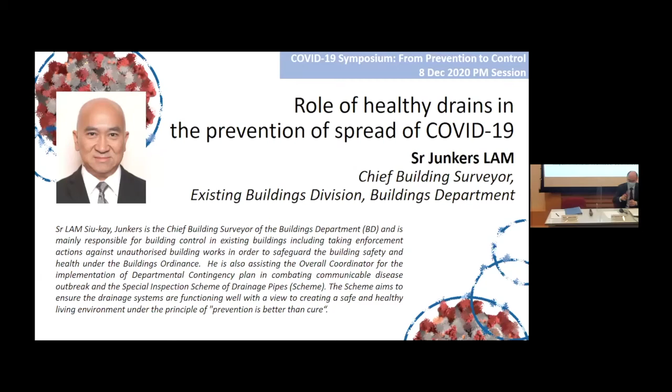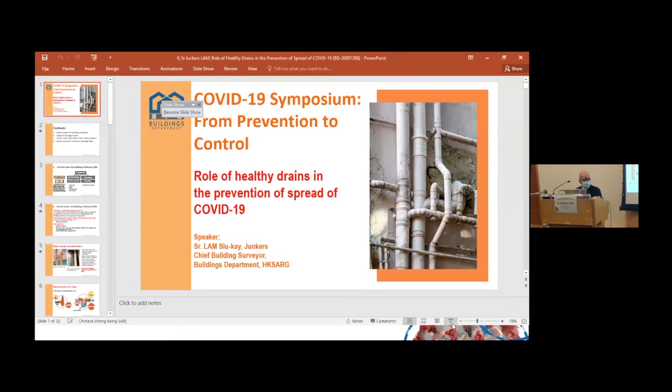I am Junkers Lam, a building surveyor by profession, and I am now working in the Buildings Department, Hong Kong SAR government. Thank you, HA, CHP, and also Department of Health for having me here to talk about something on drainage, with the topic: role of healthy drains in the prevention of spread of COVID-19.

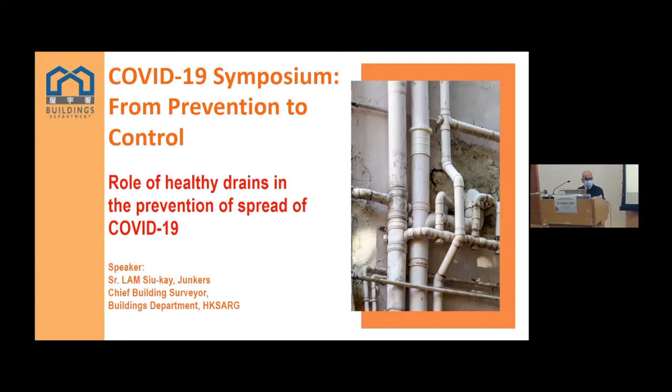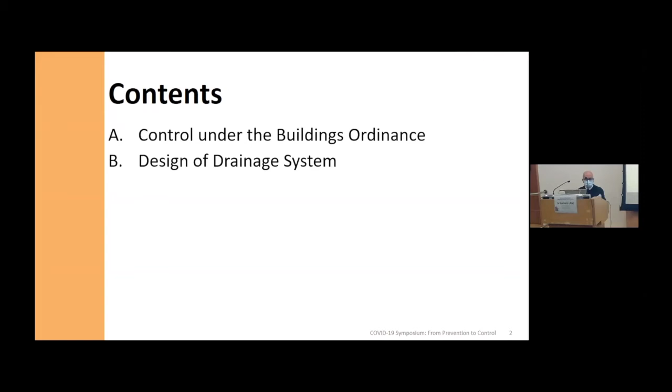The content of my presentation is divided into the following parts. A, control under the Buildings Ordinance. B, design of the drainage system. And C, lessons learned: the SARS in 2003, Amoy Gardens. And the last part is the special inspection scheme of drainage pipes.

In preparing this PowerPoint, I reminded myself not to include too many technical details, otherwise it's too boring. So I will adjust it a little bit by showing only the essential aspects, with some key points and illustrations in layman terms, such that the PowerPoint would be easier to understand. Perhaps some of you may be experts in the building industry, but please bear with me if I use some layman terms or some technical terms.

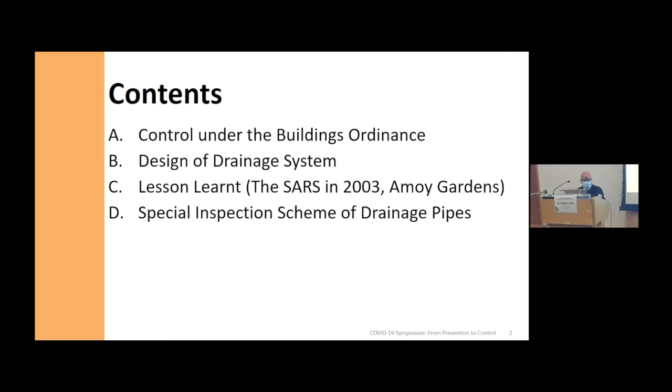The main purpose is to highlight the importance of healthy drains in buildings, how healthy drains make possible healthy buildings, and then how healthy buildings make possible healthy occupants.

Here is Part A concerning the control under the Buildings Ordinance, because the Buildings Department is one of the government agents to administer building control under the Cap 123 Buildings Ordinance. In the slide, you can see there are 3 departments or 3 authorities taking care of buildings or building works in Hong Kong.

Some of them are government buildings or public housing blocks, which are under the jurisdiction of ArchSD and Housing Department respectively. For example, public rental housing blocks are fully exempted from the Buildings Ordinance. And government buildings, for example public libraries, markets, stadiums, hospitals, government offices, are under the jurisdiction of the Architectural Services Department. They are also not subject to control under the Buildings Ordinance.

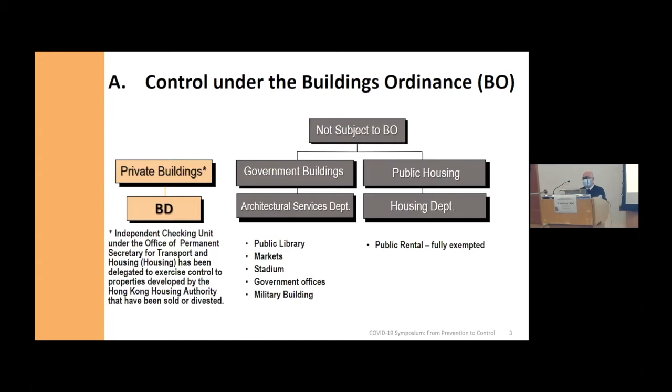Then what else is under Buildings Ordinance control? That is all the private buildings. For example, offices and hotels on private land. The building works, including drainage work, are also subject to the control of the Buildings Ordinance. So in other words, drainage or the maintenance of drainage work is also subject to the control of the Buildings Ordinance.

So let me say a few words on the ordinance. Section 28(1) of the Buildings Ordinance, Chapter 123, stipulates that all drainage work for any building shall, save as provided by regulations, be carried out by the owner of such building to the satisfaction of the Building Authority and in compliance with regulations.

You may ask, how can the architect or the engineer or the designer comply with this section, because it just says to the satisfaction of the Building Authority. How? Okay. There are also subsidiary regulations, called the Building (Standards of Sanitary Fitments, Plumbing, Drainage Works and Latrines) Regulations, which is Cap 123I. It provides the technical requirements concerning drainage work, and specifies to what standard the designer or architect should comply. Then the Building Authority would accept it under the Buildings Ordinance.

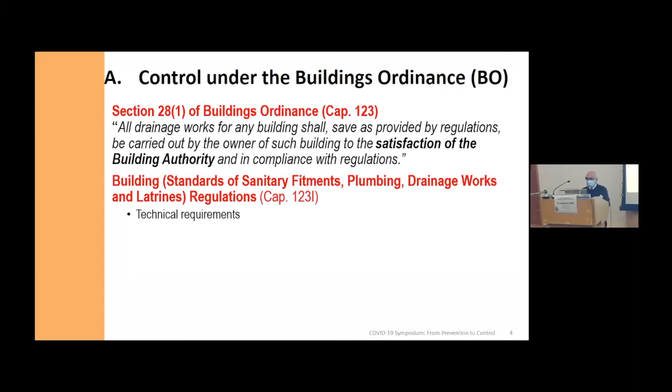So these are the regulations. The main objectives are, first, health and hygiene for the benefit of the users and occupants, or in other terms, the general public. And the drainage work has to be designed and operate as efficiently as possible, such that all the rainwater, wastewater and soil water discharged into the government sewage system are treated properly and efficiently. That is the main objective of this regulation.

The end result is to prevent the contamination of effluents and also prevent the spread of smell, insects and bacteria, etc. So in health or medical terms, just like the excretory system of the human body, we have to make sure that all the waste is discharged properly and efficiently.

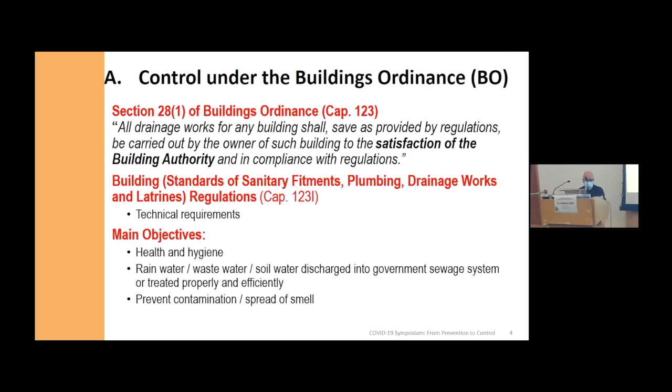In scrutinizing the drainage plan for compliance with the regulation, what are the major considerations we should focus on? That means, what are we really concerned about when we're talking about drainage work? Here are two pictures showing first the external wall of the building. You can see there is drainage work attached to the external wall of the building.

There are some bigger pipes, there are smaller pipes. All these are comprising the drainage system. And also the second picture is showing the internal pipe duct, which is accessible from common parts.

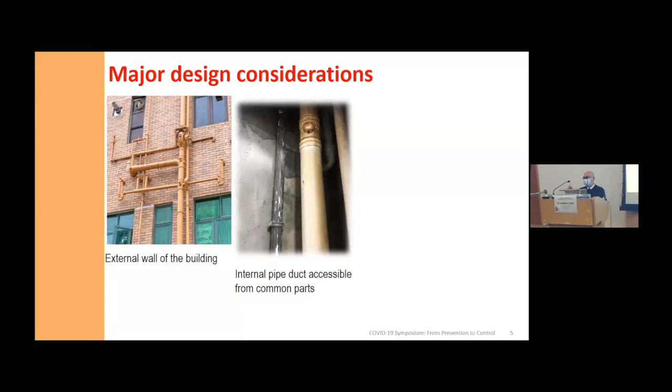What I'm showing here is the main consideration is the proper access to the drainage work. That means we have to have a way to carry out the inspection, to carry out the maintenance and also the repair.

And there is a new building construction regulation which will be effective very soon. One of the main requirements is the access for external maintenance that will be stipulated in this new construction regulation.

And also there is a code of practice on design for safety, external maintenance, that provides some guideline for the practitioner and also the users, so to speak, to look after the design for safety of the external maintenance work.

And also the Buildings Department had issued guideline, so-called PNAP APP 93. There are further details showing the way the designer should pay attention to in order to provide a proper access, or referring to the importance of access.

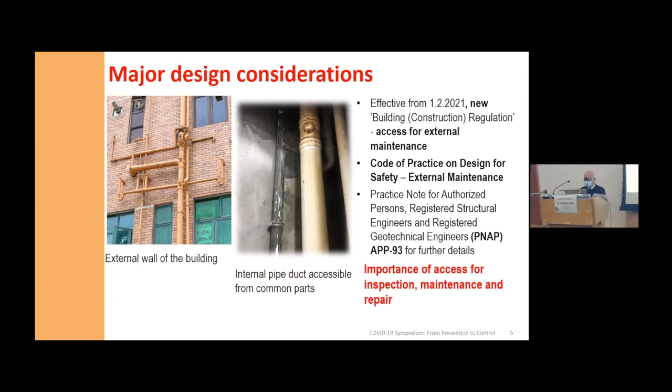For the importance of access, may I just draw an example in your medical or clinical aspect? Just like the doctors doing diagnosis with their patient, they have to have proper access to identify all relevant symptoms of the patients, no matter externally or internally. That is almost the same principle in drainage work. Okay.

Another consideration is the requirements for traps. The picture showing here is the two typical traps, what we call a device to hold certain amount of water seal such that the air or the smell would not get back into the interior.

Let me explain a little bit more. For example, this one is called bottle trap, which is very typical sanitary fitment. You can easily find it underneath a sink. This bottle holds the water, and the discharge water coming in from here by gravity will fill up the bottle, and then the extra amount of water or the waste will drain away this way by gravity.

It's a gentle fall. And the bottle here holds up the water. That is what we call the water seal, such that with the water filling up here, the smell would not get in because the water is still there. It would not get back to the pipe.

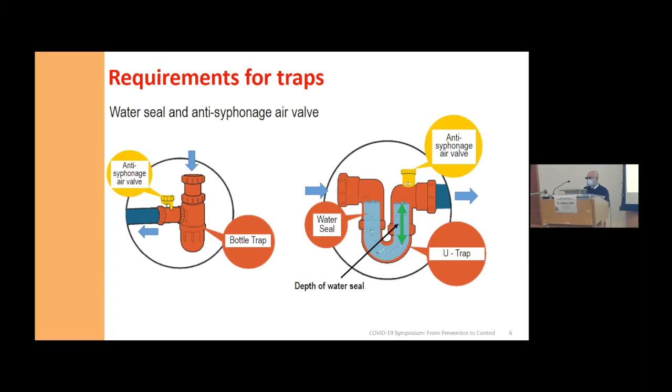But the water inside the U-trap will be kept there. So the smell and also the bacteria would not find its way to get back inside the interior because there is a barrier. The main purpose is to let the discharge pass through but leave the water there to prevent the smell and also the bacteria getting back into the interior.

Okay, for the trap, there are also requirements stipulated in relevant regulation concerning the water seal. In regulation 24 and 25 of the regulation I just mentioned, there is a simple dimension. For example, different types of fitments, soil fitment we just mentioned, and also waste fitment, for example basin, bath, floor drain, they have different requirements, for example the depth of the water seal.

For soil fitment, the depth of water seal is 50 mm, which is a little bit larger than the waste fitment, for the basin and bath, which is only 40 mm. But if the waste fitment with waste pipe is connected to a soil pipe, then the depth of the water seal will be double.

The requirement is more stringent because for waste pipe connected to a soil pipe, the soil pipe carries solid waste, so the water seal should be a little bit more. And also the diameter: you can see for discharging soil, the internal diameter is much larger, which is 80 mm, whereas for normal waste, the diameter is only 32 mm.

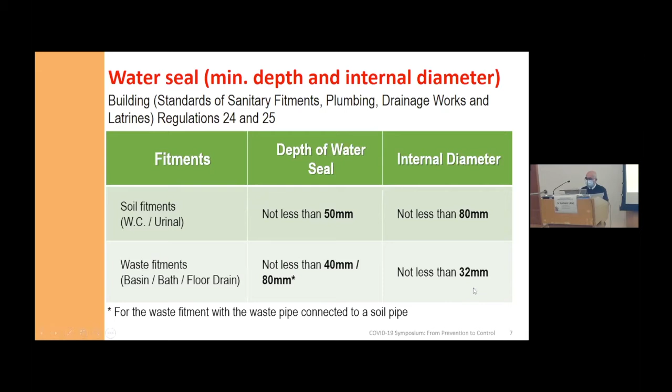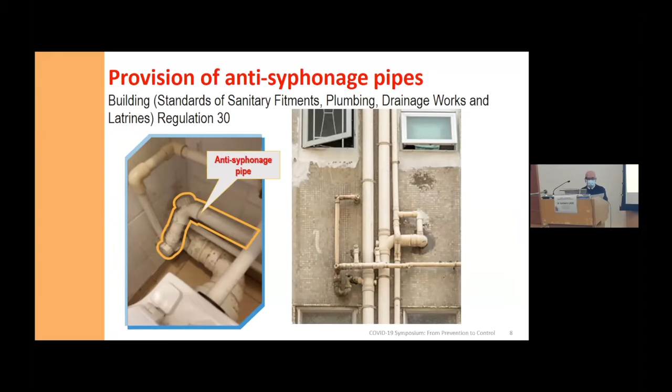Okay, if you look at the external wall, you can also tell there is an anti-syphonage pipe. This one, for example, this is the anti-syphonage pipe, and also this one. And this pipe, by the nature of its name, is called anti-syphonage. So the main function is to stop the siphonic action.

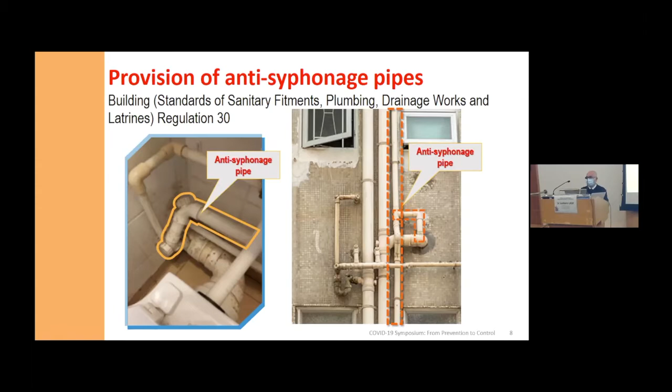And this anti-syphonage pipe would be carried up to a height not less than 1 meter above the roof. For example, in these two pictures, typical high-rise buildings in Hong Kong, you can see this is the anti-syphonage pipe and also connected with the ventilating pipe. They are carried up to a height of not less than 1 meter above the roof. These two are also the ventilating pipes.

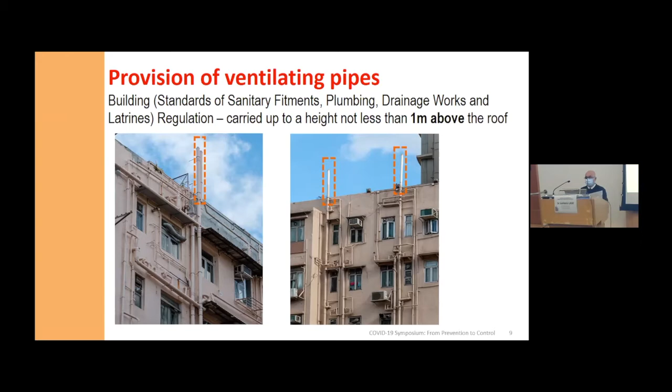And the main purpose of this ventilating pipe is to balance the pressure inside the pipe caused by a suction effect induced by fast-moving water flow in the main downpipe. Usually, the air would get into the opening of the ventilating pipe to balance the pressure, but chances are some air would also be coming out from the ventilating pipe. Hence, they are required to be carried up to the main roof, above the roof level for at least 1 meter, where the outgoing air would be diluted by the open air.

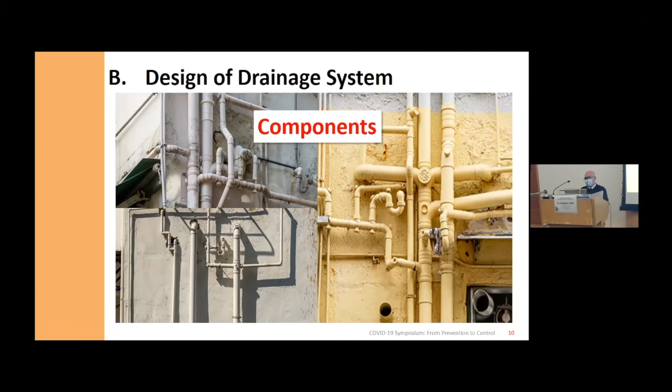Okay, part B is the design of drainage system. You can see there are so many pipe works, and what are the components? We are going to focus on the main components. First, the rainwater pipes. The rainwater pipe is to discharge the rainwater from the main roof, flat roof, or balcony, etc. Because for a building, there must be some roof. In Hong Kong, most of them are flat roofs. In other countries, North America or Europe, you can see other roofs, say the pitched roof. But in Hong Kong, most of them are flat roofs.

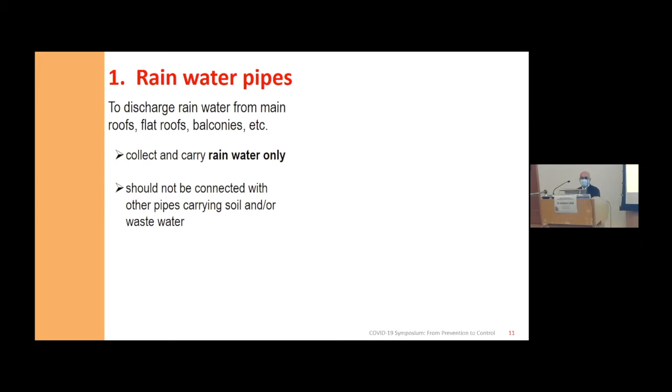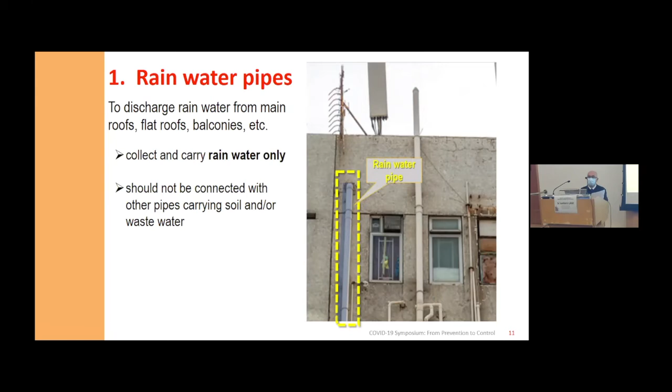So we have to carry away the rainwater. Otherwise, flooding will occur during rain. And also, the rainwater, if not properly drained away, will create a hygiene problem. So it collects and carries away rainwater only. That means it should not be connected with other pipes. For example, this picture shows the rainwater pipe. You can see there is no other connection with it. It's only designed for carrying away the rainwater.

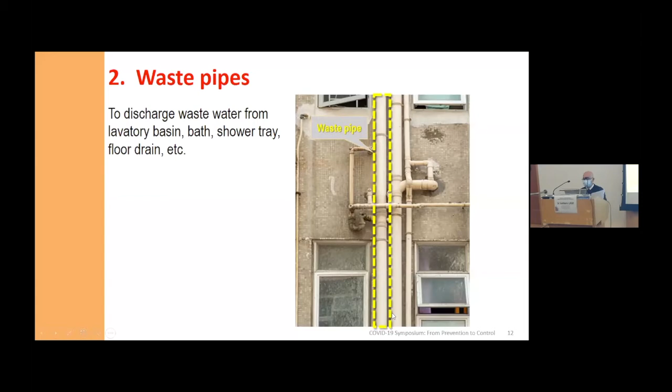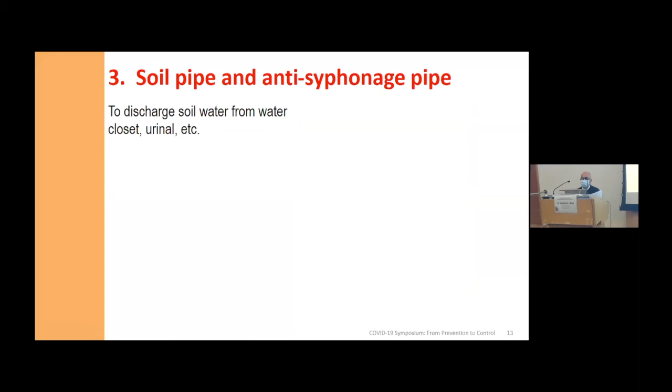And the soil pipe. This is the bigger pipe to discharge the soil water from water closet, urinal, etc. This is also the picture of the previous slide, but for the soil pipe, this is another pipe. This is the one on the left hand side, or sorry, right hand side. And this is the soil pipe. How can you tell? From the size of it. You can see this is the WC, the outlet of the WC. This is much bigger than this one. So you can guess this one must be the soil pipe because it is used to discharge the soil water from the water closet.

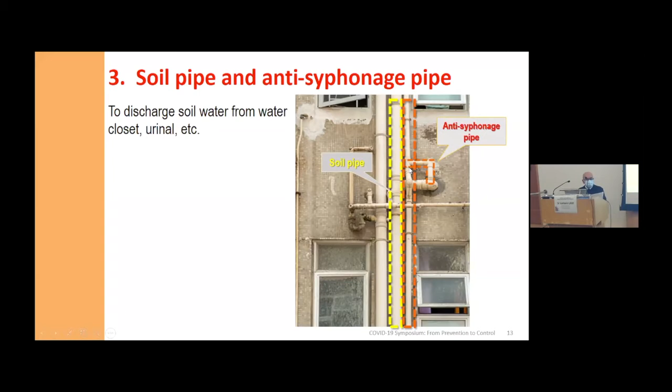And also connected with the soil pipe, this is the outlet, and this one is the anti-syphonage pipe. This is the ventilating pipe. The one with the dotted orange line is the anti-syphonage pipe. Okay, they are the main components in the drainage system.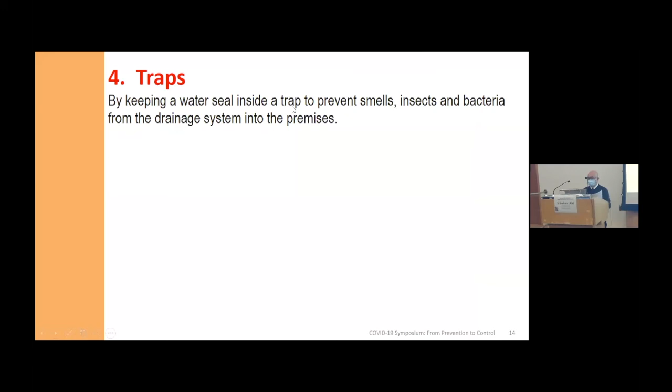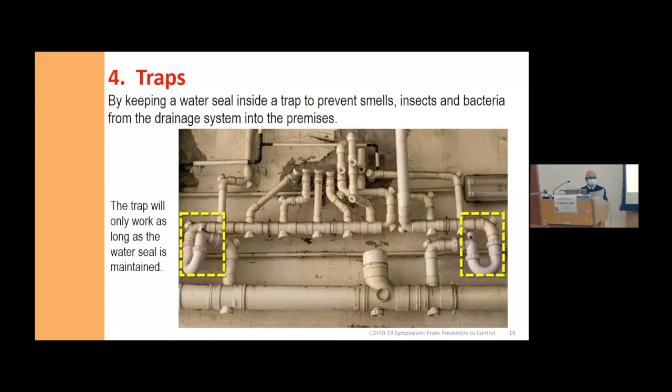Okay, what are the types of traps? There are quite a number of types, but the most popular types in Hong Kong are two. One is the U trap that I have shown you in the previous slide. This is the condition without water, before the assembly, and you can see there is a U shape. The one with a higher level is the inlet. The one with a lower level is the outlet, such that the water can flow and discharge away.

And the other type is the bottle trap, just like a bottle. This is showing the condition without water and also the condition before assembly. This is the bottle part. The water comes from the top and fills up the bottle, and then finds its way when its level rises, and then discharges through here.

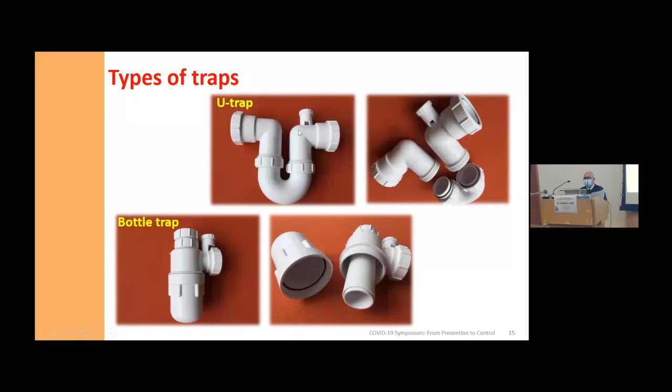And you may notice that there is another small part in each of the traps. This is the anti-siphonic air valve, just like this one and this one. Let me explain a little bit. This part is an air valve. That is a one-way valve.

That means the air can get into the U-trap, but the air and also the water cannot go out. That is a one-way valve, just like a one-direction gate, for example. It opens only in a single direction. It is a small device that can let the air get in, but cannot let the air and the water go out.

Its main purpose is to balance the pressure inside the trap, such that the water seal would not be drawn away. I will show you later how it works.

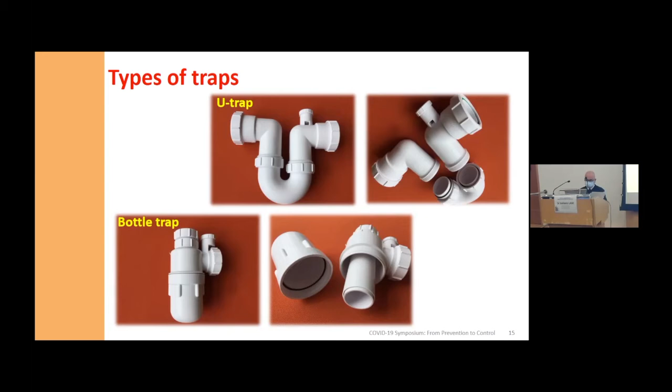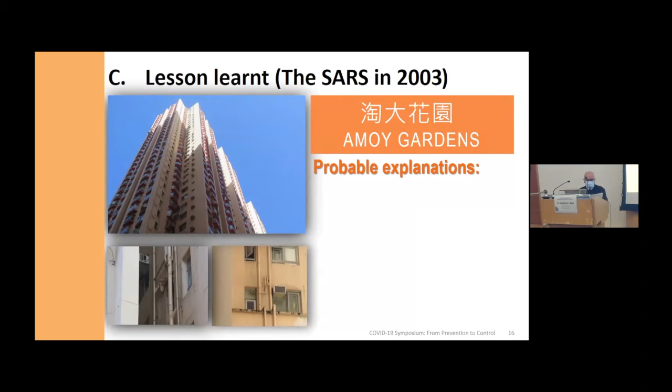And this is part C, the lesson learned, the SARS in 2003. Most of us would not be unfamiliar with the SARS in 2003. According to the investigation report published by the Department of Health in April 2003, no one single factor could account for the outbreak, and it is likely to have been the result of a combination of factors, including person-to-person contact, combined with the presence of a highly infectious index patient, and also the possible spread by way of use of the communal facilities.

And concerning the drainage, they also found possible factors regarding a defective anti-syphonage pipe at the 4th floor of Block E, and concerning the sewage system, they found that it had not been properly maintained, especially the U-traps. The water seal inside was found dried out in some traps. That is the main finding. It concerns the loss of water seal. For more detail, you can refer to the investigation report published by the Department of Health.

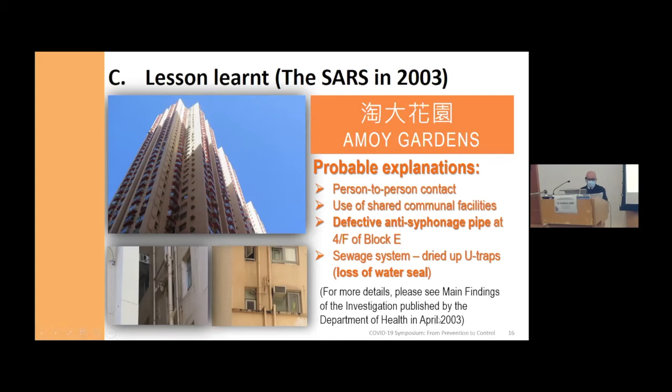And I would like to take this opportunity to explain why the water seal inside the trap could be lost. First, it is by natural evaporation. For example, if the sanitary fitments have not been used for a long time, depending on the ambient temperature and the humidity, the water seal inside a trap would dry up easily, especially in the dry season. So if you fill up the U-trap regularly, for example, every week with half a liter of water, then it should be okay.

The second main reason is leakage. That is a maintenance problem, or the owner has not paid attention to any symptom concerning the drainage work. For example, if you smell something bad, or if you see some water stain, then that is a symptom of leakage. Employ a building professional or contractor to have the drainage system checked carefully.

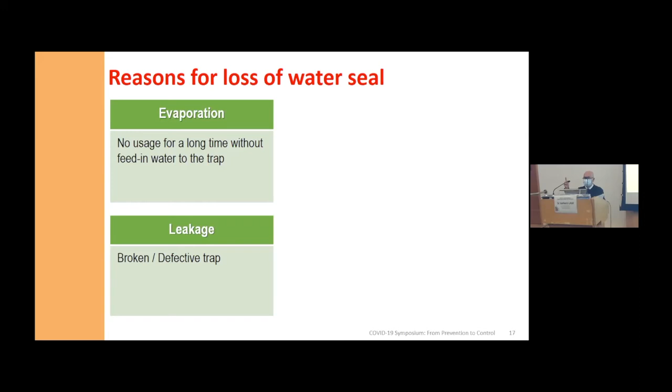The other reasons are rather technical, but I will explain a little bit more. That is self-siphonage. That is a partial vacuum formed when a large amount of water discharges. For example, the bathtub: after you use the bath, you just lift the plug and the water drains away. The large amount of water flows very fast and in full bore. That means it fills up the branch pipe.

That will create a partial vacuum in the trap. That partial vacuum will draw away the water seal in the trap if there is no anti-siphonic device. That's why all the traps should be provided with an anti-siphonic device, either the air valve or a connection to the anti-siphonic pipe.

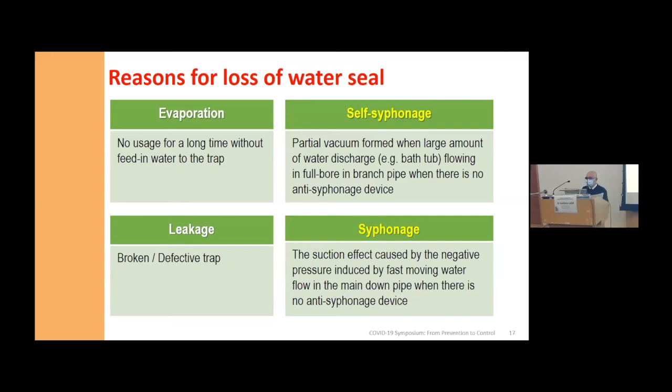And the fourth one is induced siphonage. That is the suction effect caused by the negative pressure induced by fast-moving water flow in the main down pipe. That is the picture I've shown you a few slides ago, the main stack there. When the water discharge moves downward very quickly, it creates suction. If there is no anti-siphonic device, then the water seal in the trap will be sucked away or carried away also.

Okay, I think even though I have tried to explain a little bit more, I think it's better to have a look at the videos such that you can see how the siphonic effect is created, and also how to prevent this siphonic effect. So I would like to show you the video.

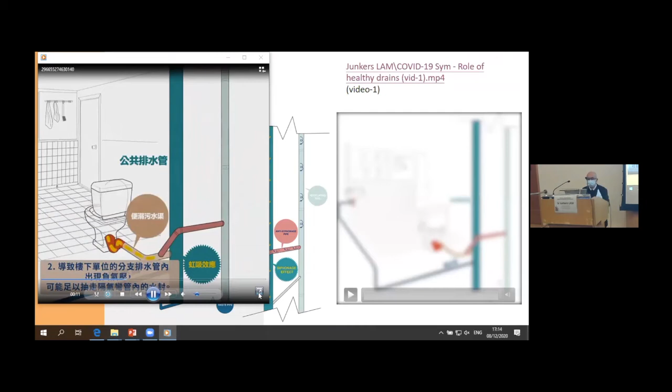This is the fast-moving water coming down the pipe, and this is the water closet. This is the soil water. If there is no anti-siphonic pipe, the water seal in the part highlighted with orange will also be sucked away. That is the siphonic effect.

But if it is connected with a ventilating pipe or anti-siphonic pipe that is connected to the higher part of the branch, connected to the water trap, then the air, this is the air from the roof, the air will come in and neutralize the negative pressure such that the water seal would not be carried away.

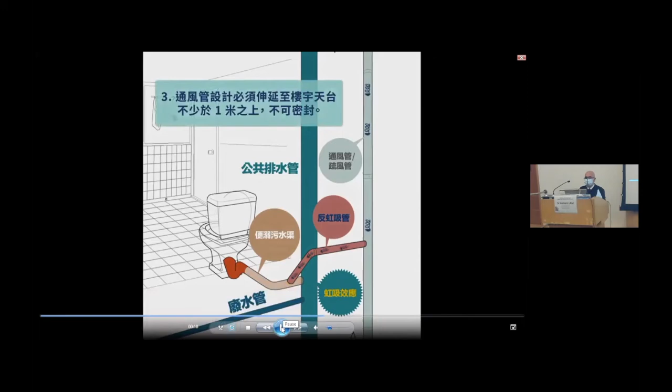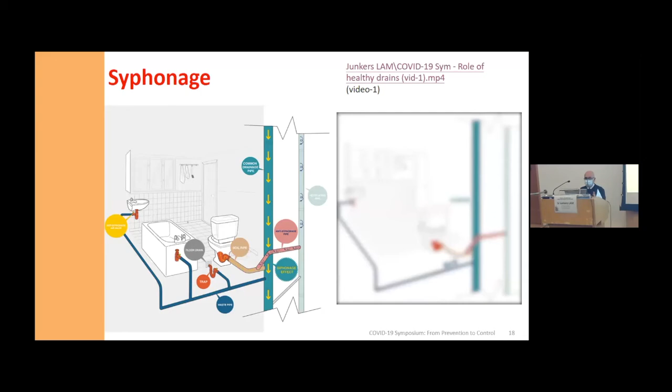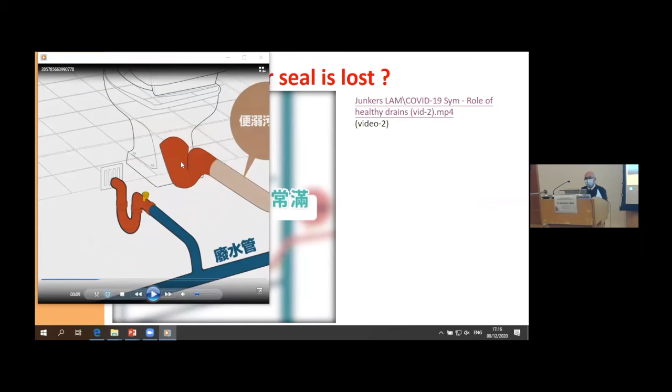Okay, the other video that I will show you is if there is a loss of water seal, that means the water seal has gone. What happened? That is the two traps. One is connected with the floor drain, and the other one is connected with the WC.

And if the water seal inside the trap has gone, and also if the bathroom exhaust fan is switched on, it will exhaust air inside the bathroom and create a negative pressure inside the bathroom. Then what happened? The negative pressure inside the bathroom will draw the air from outside wherever possible. That means if there is an opening or a crack, the negative pressure inside the bathroom will create a suction effect to draw the air in.

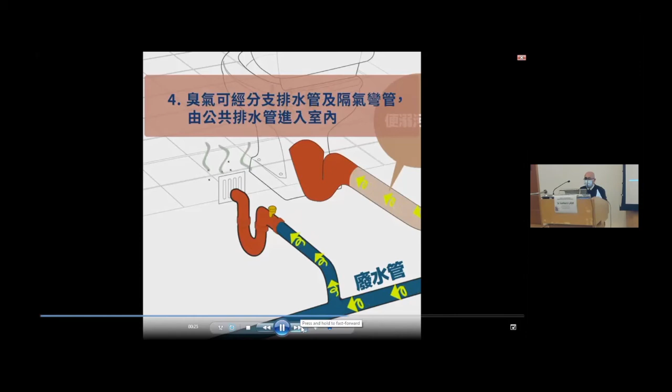The floor drain, of course, has to be connected with the pipe to discharge the water. If the water seal inside the trap has dried up, then there is no more barrier. So the waste, the smell, and also the bacteria will get into the room. So that's why it's prudent to refill the trap with water regularly.

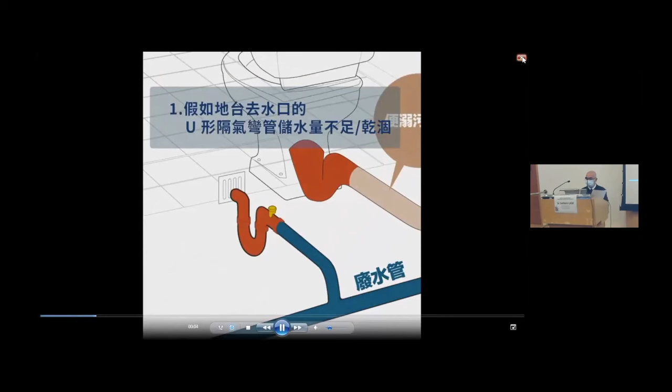Okay, we have seen two videos showing the effect. For the stakeholders and also the practitioners, BD has been issuing new and revised PNAPs since 2003 to remind building professionals and contractors to pay more attention to the relevant aspects. For example, the requirements for submission, the planning and design of drainage work, and also the pipe material.

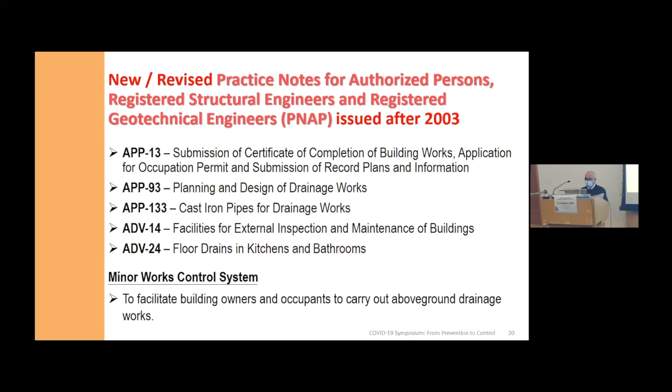And also, as I mentioned in the beginning of my presentation, the facility for providing proper access to carry out inspection and maintenance, and for floor drains in the kitchen and bathrooms with a U-trap, they have to be filled up with water regularly. And in 2010, we introduced the minor works control system to facilitate owners and contractors to carry out small-scale building works, including above ground drainage work, with faster and simpler procedures while complying with the requirements.

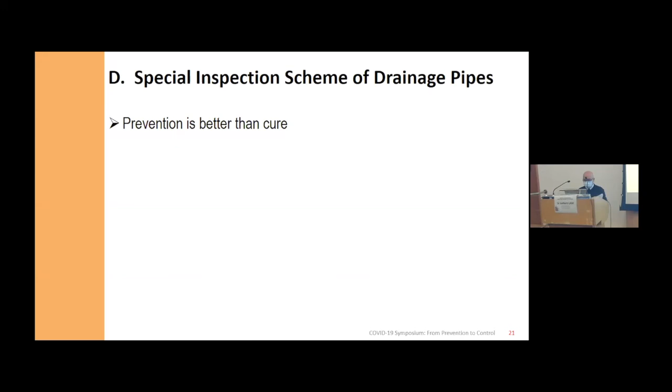Okay, here is the last part of my presentation. That is the special inspection scheme of drainage. Since the COVID-19 epidemic occurred earlier this year, the community attached greater concern and attention to their drainage work. So with the main principle and common belief that prevention is better than cure, the government has launched a special inspection scheme of drainage pipes under the AEF, the Anti-Epidemic Fund, to proactively inspect the external drainage pipes by a consultant appointed by the Buildings Department.

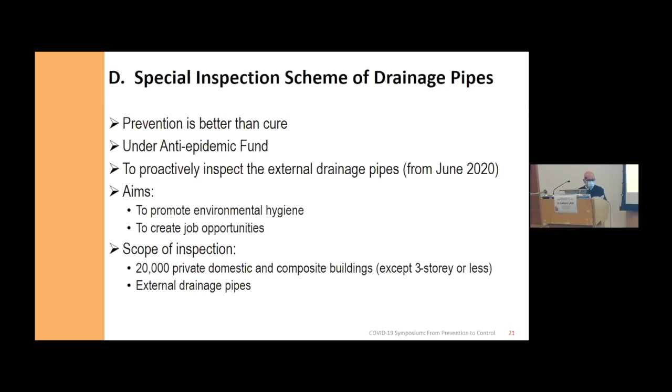It was started in June this year, and the main aims are first to promote environmental hygiene and at the same time to create more job opportunities. For the scope, we aim to inspect 20,000 private domestic or composite buildings. But buildings of 3 storeys or less will be excluded from this scheme. And only the external drainage pipes will be visually inspected.

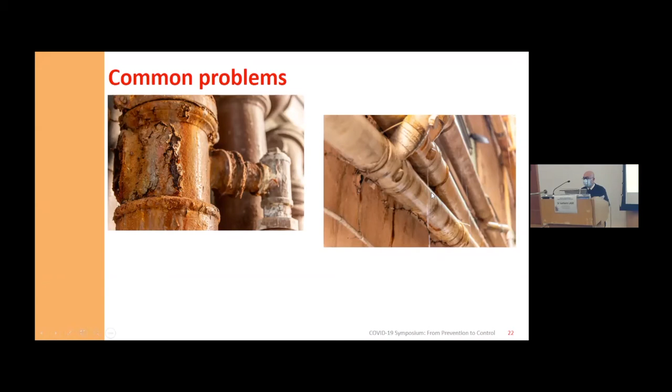So the main problem or common problem that we would find out during inspection would be like this: rusting, defective drain with water dripping or leakage. That is the common problem that we can see in drainage systems in Hong Kong. And the causes are also obvious. That is lack of maintenance and repair.

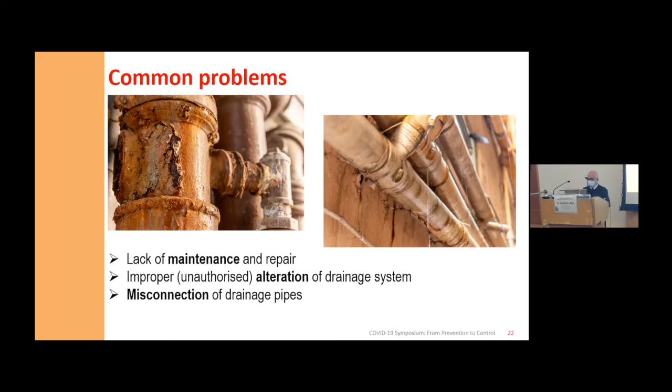And also some owners or occupants do not know the correct way to get the alteration or to carry out the addition of the drainage work. So that is the improper or unauthorized alteration. And also the misconnection of drainage pipe. Remember that I have mentioned that the rainwater pipe should not be connected with any other soil or waste pipe. But in some cases the rainwater pipe has been connected with the soil pipe. That will create a hygiene problem.

And if we find that kind of problem, then we will resort to the legal requirements and issue the drainage repair order to the owner. If the drainage pipes belong to the common part of the building, then the drainage order will be issued to all the co-owners. If the drainage pipe concerns one individual premises, then the drainage repair order will be served to the respective owner.

We allow 1 to 6 months for the owners to comply with the order, depending on the complexity of the work, the scale of the work and also the nature of the drainage repair works. So they have plenty of time to comply with the order. But if they do not comply with the order within the period, then we will carry out the repair work for emergency, and we will issue a demand note to the owner to get back the cost of the work because it is public money.

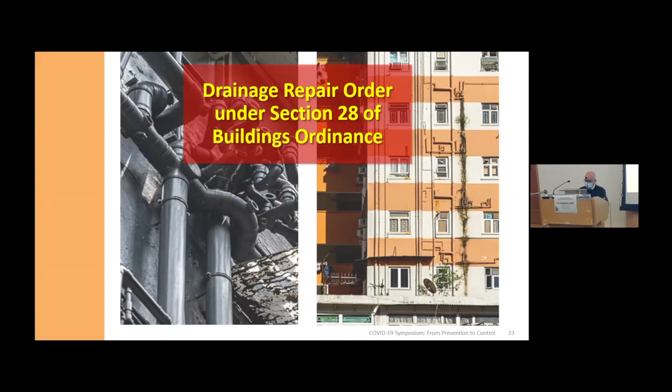So for owners' responsibility, it is their prime responsibility to keep the drain healthy by, for example, maintaining the drainage pipe regularly, and not altering the drainage system casually. And also, if they want to carry out some drainage work, please do appoint qualified professionals or contractors. Of course, some eligible owners may apply for loans or subsidies for inspection and repair.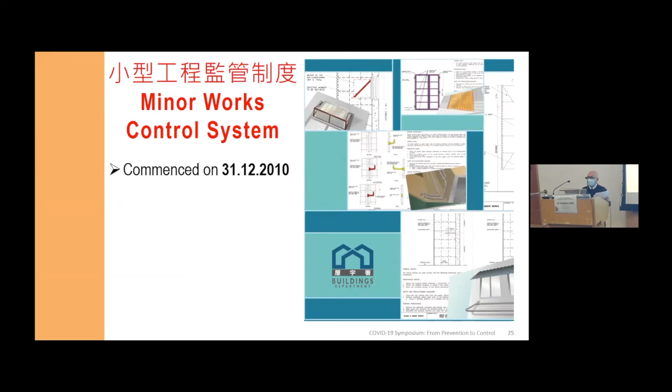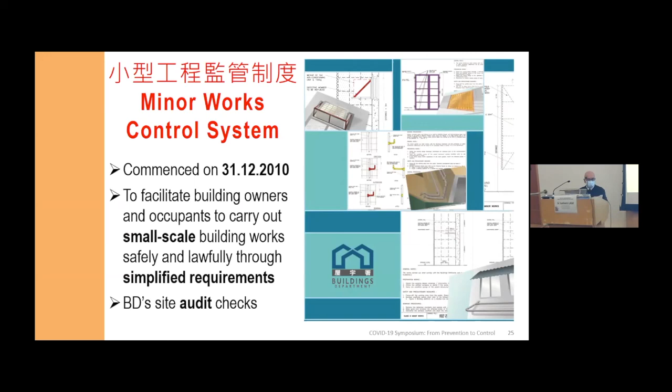For the minor works control system I just mentioned, we also have the simplified requirement or simplified procedure for the owner to carry out the drainage work safely and lawfully. And in order to ensure the quality, the Buildings Department will carry out site audit checks regularly. For above ground drainage, works are divided into different classes. Here I'm showing you the typical alteration or repair work. For example, class 2, item 2.30, that is the repair works to the main stack. And if it is related to a branch pipe not involving the main pipe, that is class 3. And we will step up the audit check of completed minor works for above ground drainage systems.

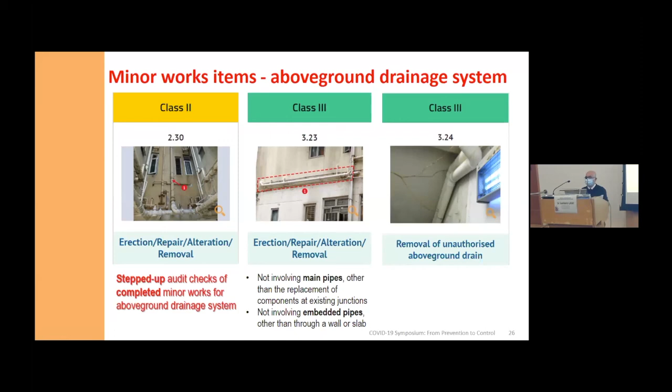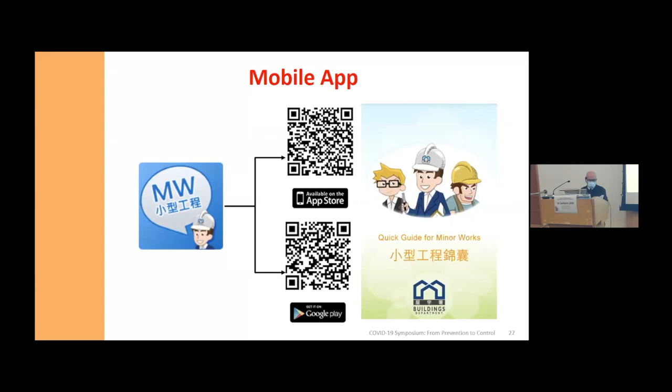And apart from much relevant information uploaded to our BD website, we have prepared a mobile app for users to download. And as part of public education and publicity, we have also created some other apps to help owners appoint qualified professionals and contractors. We have also prepared a comprehensive information pack to help eligible owners apply for loans or subsidies for carrying out inspection and repair to the building. As part of our publicity and public education, we have been advocating especially for property owners to appoint qualified professionals or contractors for carrying out building work, including drainage work.

Here is the last video that I want to show you concerning the drainage.

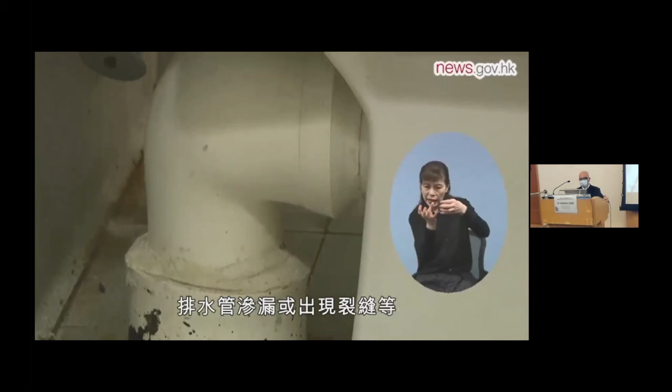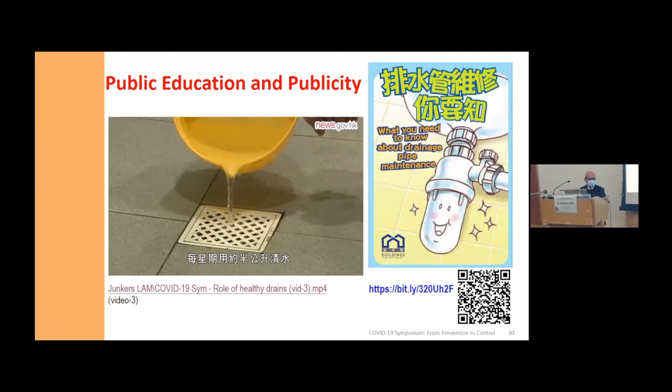I'm sorry that it's in Cantonese, but I think it is very easy for you to understand, especially for those overseas. And it is almost coming to the end of my presentation.

Let me show you a picture of popular scenery that you can easily find in Hong Kong. As an expert or practitioner in the medical or healthcare industry, you would probably be concerned with the aging problem in Hong Kong. Likewise, as practitioners in the building industry, we are facing a similar challenge, that is aging building blocks. If building components, including the drainage system, are not properly maintained or kept in healthy condition, many problems will surface. In the beginning, I mentioned that a healthy drain makes possible a healthy building, and a healthy building makes possible healthy occupants and healthy environments.

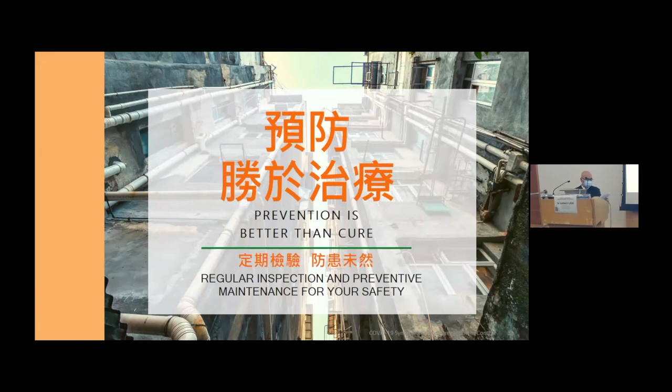There is a saying in the building industry that building professionals like architects, engineers, or surveyors are to a certain extent also doctors. Yes, they are doctors. They act like doctors to buildings. So let us join hands, work together, and fight together to advocate our common belief that prevention is better than cure. And thank you for your time.